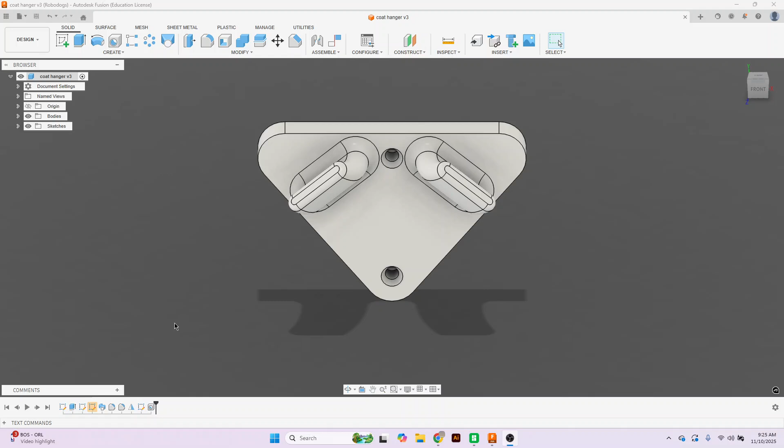All right, for this one, we're going to go ahead and make a coat hanger. You can customize it however you want, but this is how I did mine.

We're going to start by creating a new design, and in this one I believe I did it in inches, so let's do inches. Let me just double check my dimensions real quick. Yeah, we're in inches, we're good.

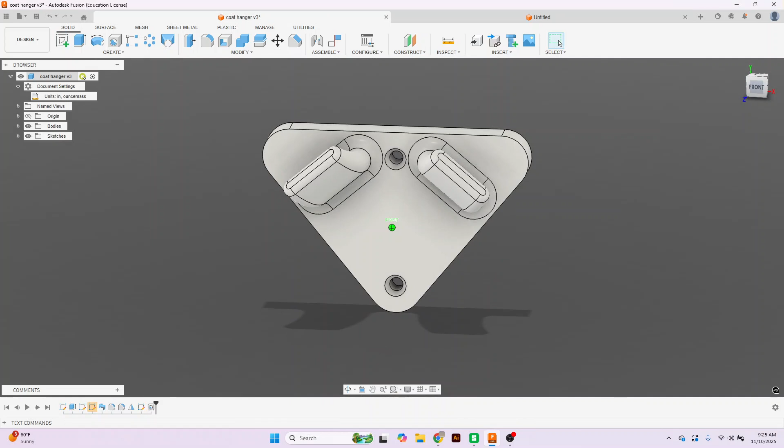Create new sketch. What view am I on? XY. So I'm going to select the XY plane. And I created a triangle.

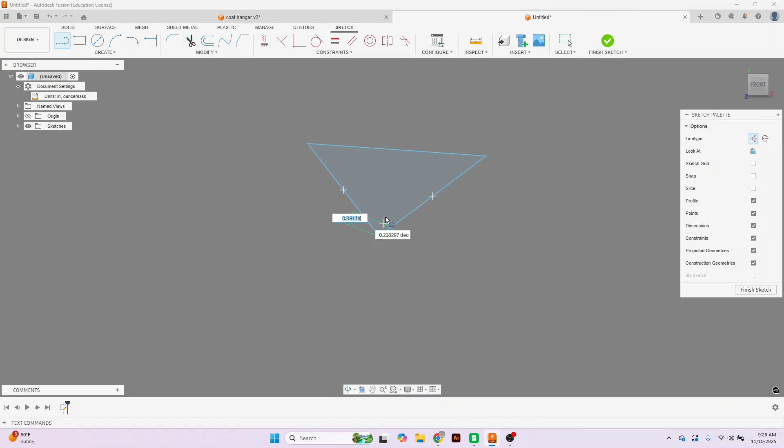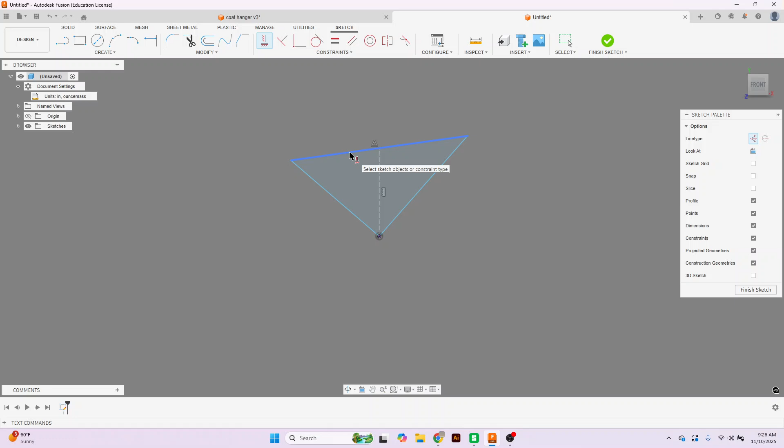You can tell I did put a line in the middle as a vertical line. So I'm going to do a construction line in the middle from here to the midpoint. Notice how when I'm clicking, I have a little triangle - that's the midpoint of that top line. And then when I vertical constrain it, look what's going to happen - it straightens that line out. But I also want this top line to be straight, so I click on that one, and it does a horizontal constraint. So now these two will be equal.

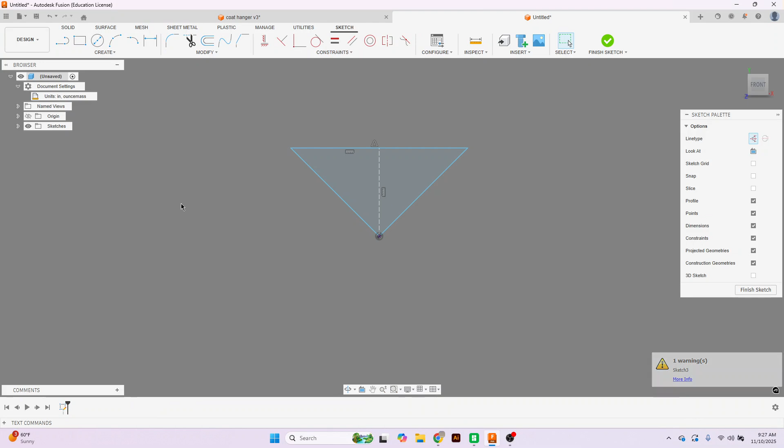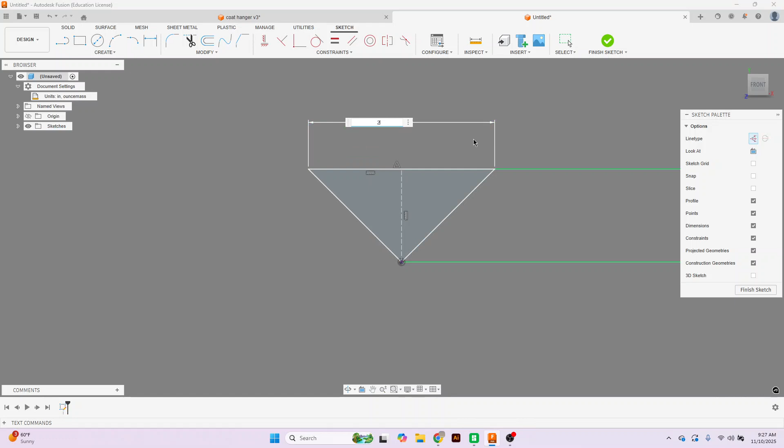I don't have a dimension for this, so let me make it 1.75. Dimension this one 1.75. And the dimension on this one, looks like I did 2 plus 2.5. So this one, this top part is 2.5. We'll adjust it if we need to later.

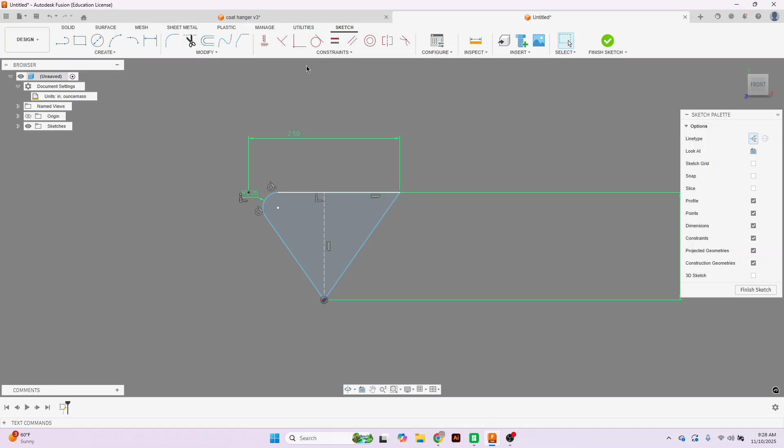Next, I'm going to go ahead and do a fillet command on each of the corners, and this one's going to be 0.25. Got to be careful, I have construction on, let me turn that back off. Fillet. Take the construction off if you have it. 0.25. And then the bottom one. Fillet. 0.25.

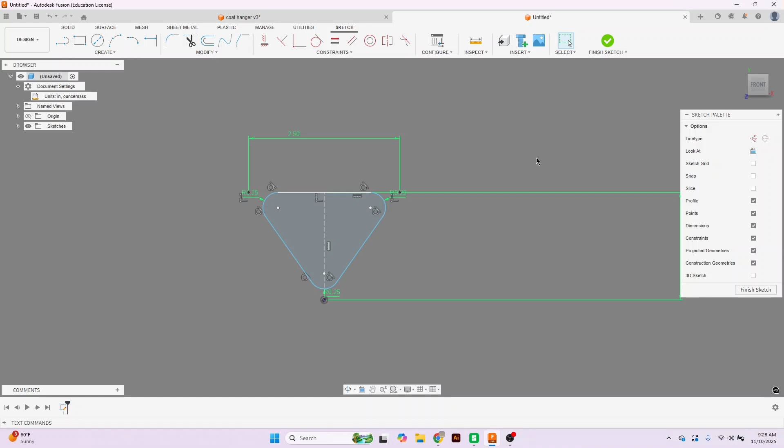These are my final dimensions. Then we're going to keep going. Finish sketch.

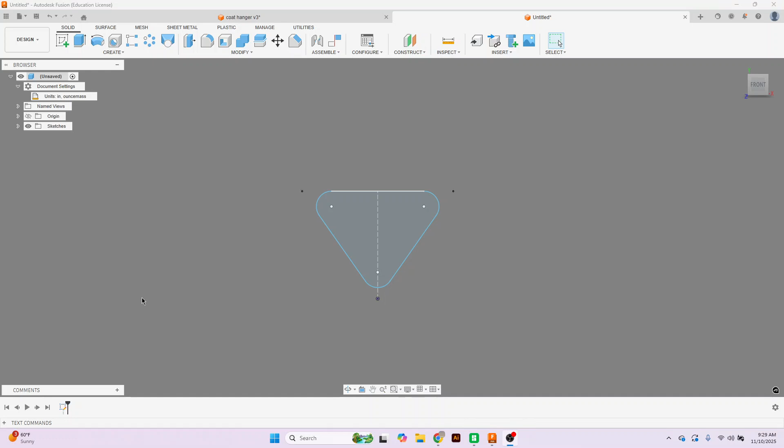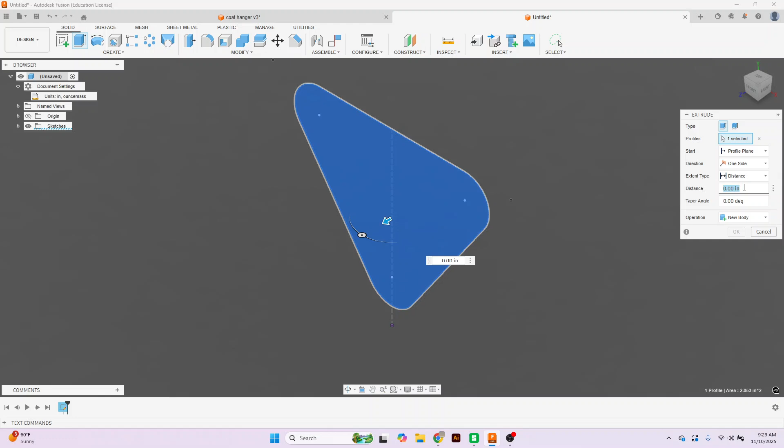All right, so now that we have this, we're going to extrude that. And I believe I extruded it a quarter of an inch. Let me just double check. Yes, a quarter of an inch. So 0.25. There we go. And now I have an extruded, filleted triangle.

The next step is we're going to put our little hooks, and the way I did that is I created a slot command. I created a new sketch. The radius is 0.125 and the length is 0.5. And it looks like this one is parallel with this one, and it's also a perpendicular constraint with this. All right, click on sketch, click on this plane, create, slot.

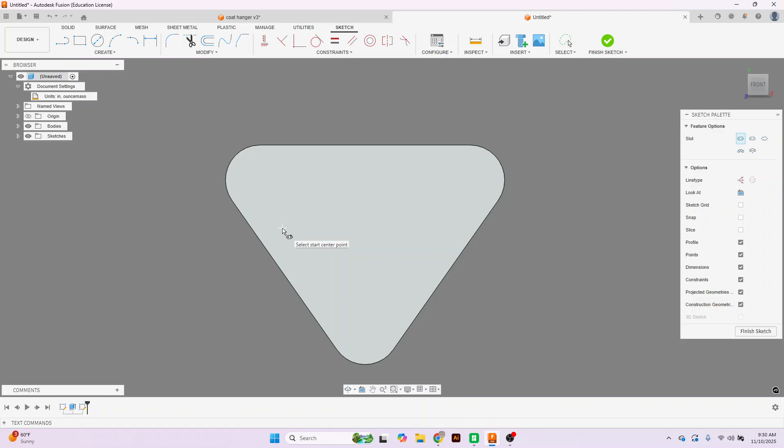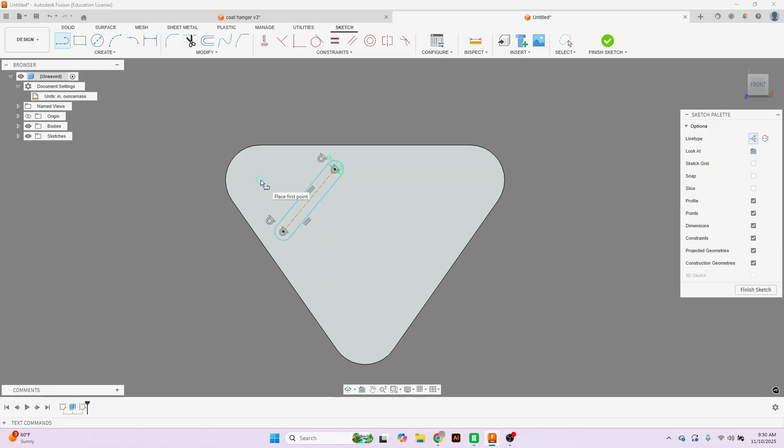And then 0.125. Now I need to have a construction line to mark this. So I'm going to add a line, make sure it's a construction line, and I'm selecting the center of this circle, of this arc here. You can see that it automatically tries to connect to it. And I'm going to connect to the circle on this side, the arc center. I'm going to do the same thing all around.

Then I'm going to do what's called a coincident constraint. Coincident constraint joins the center of this circle with this line, the center of this circle with this line. And then we're going to do a perpendicular constraint with this and this one.

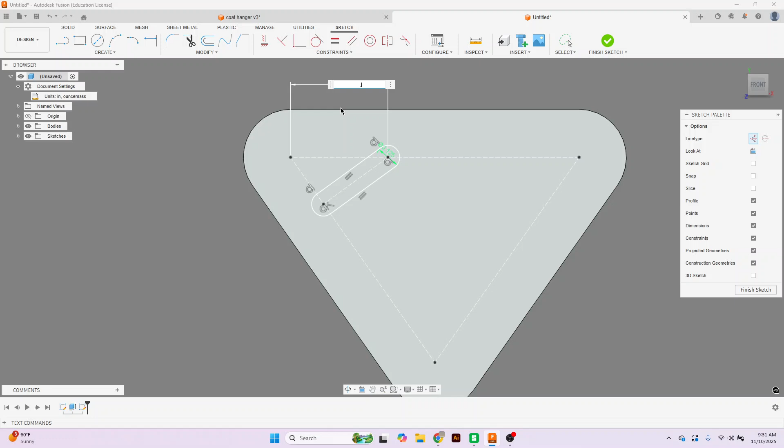Notice how it's kind of angled and stretched out. So I'm going to get out of my command, because you'll notice that it's still in the command. You got to get out of it - right click, click cancel, or hit escape. And I want this to be roughly about right there. There's a couple of different ways to do that. You just dimension this line to this line, put 0.5, and then we're done.

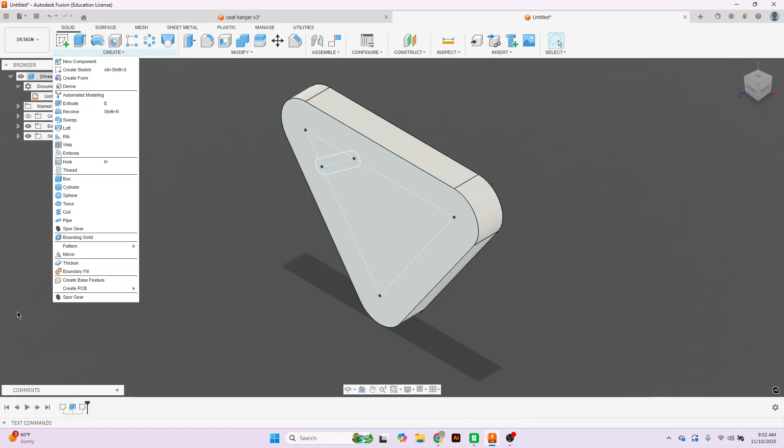You can adjust that however you want. Finish sketch. We're done with that sketch. And this is important because we're going to be doing what's called a sweep command. So we're going to draw where it's going to sweep from, so we're going to take this and we're going to make it go out.

And just to give an example, this is what the sweep command second line is. It's just going to have an arc, and this one I arced it at 1 inch.

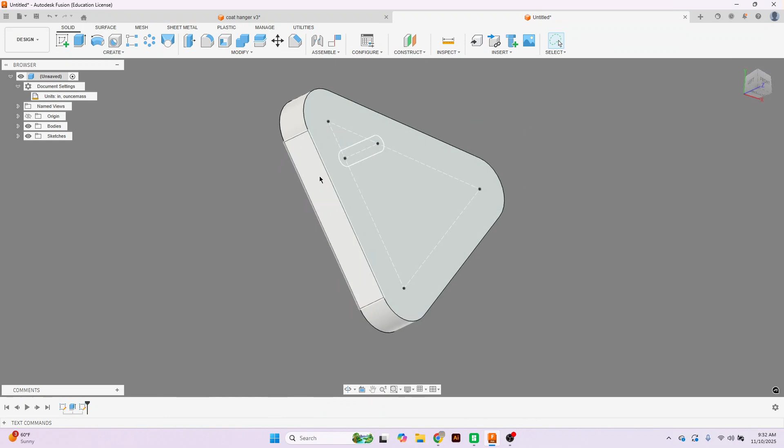So I'm going to draw on this face here. When I create sketch, I'm clicking on this side face right there, and you can see that there's a point right there.

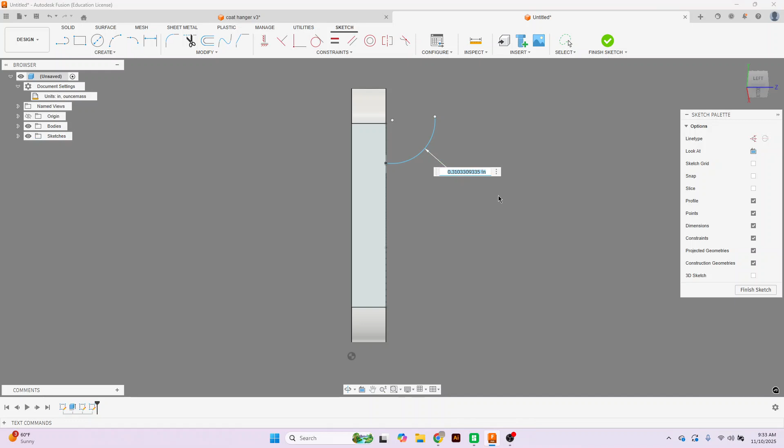That's where I'm going to start my arc. I want this one to be 0.25... it's a 1 inch arc, not 0.25, 1 inch.

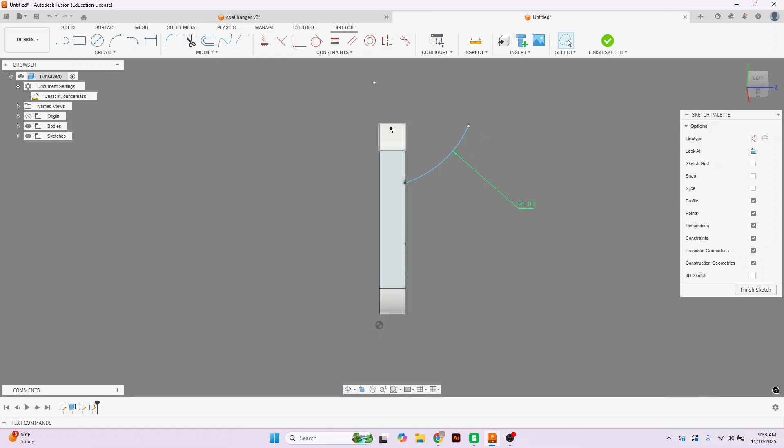I don't want the hook to pass the top part here. You could determine how high you want it. I'm going to try to do a horizontal constraint with this and this. It's not going to work.

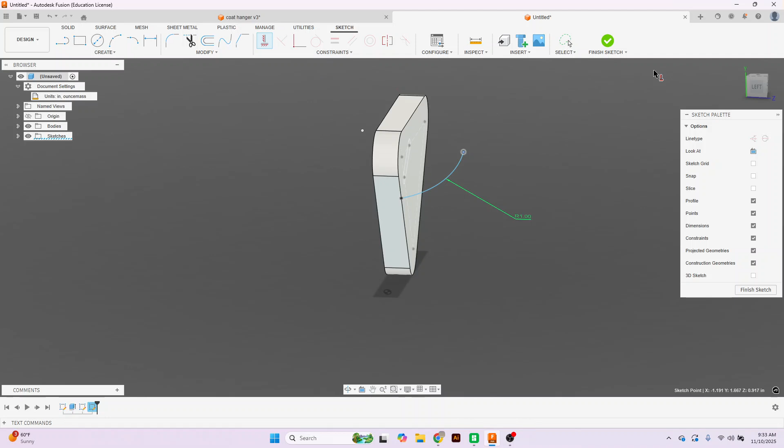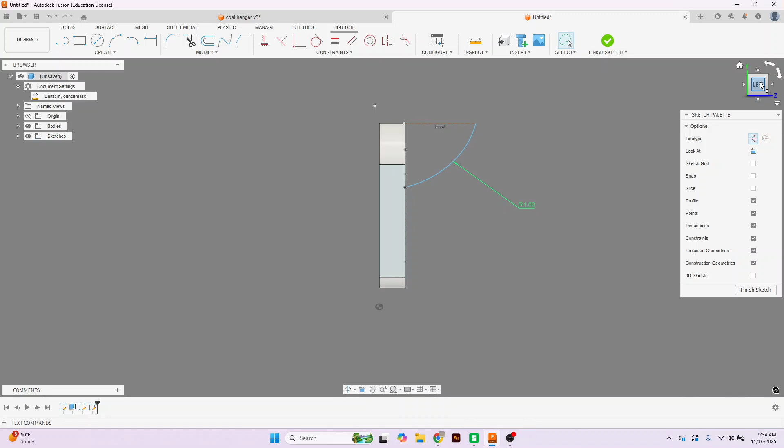So maybe I'm just going to have to draw a line, like a construction line. And then this, I could do a coincident constraint to there. Okay, so now I have my arc and then I have my line.

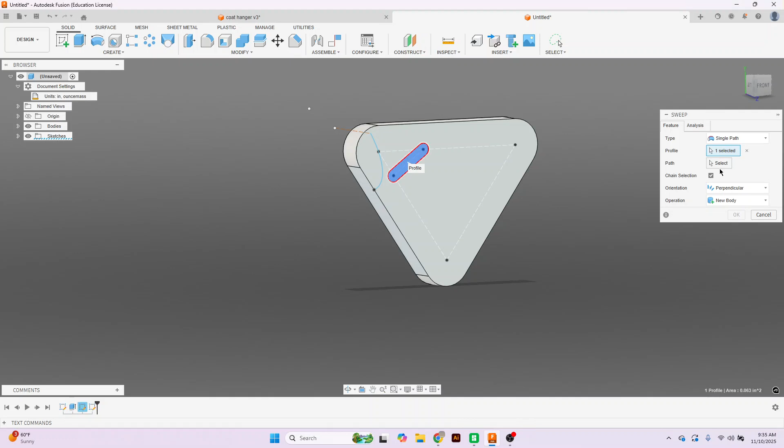Okay, so let's go ahead and click on create, click on sweep. And then our profile is what we want sweeping, so this is the slot command. And the path is this arc.

Now I think it's a little bit too much, but that's okay, I'm still going to click join. Right?

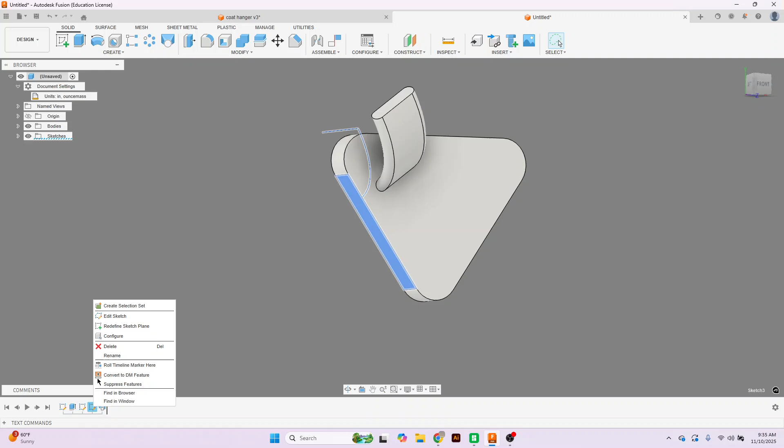And what I could do is I can just go back to the previous sketch, right click, edit sketch, and then I can see how it's a little too high.

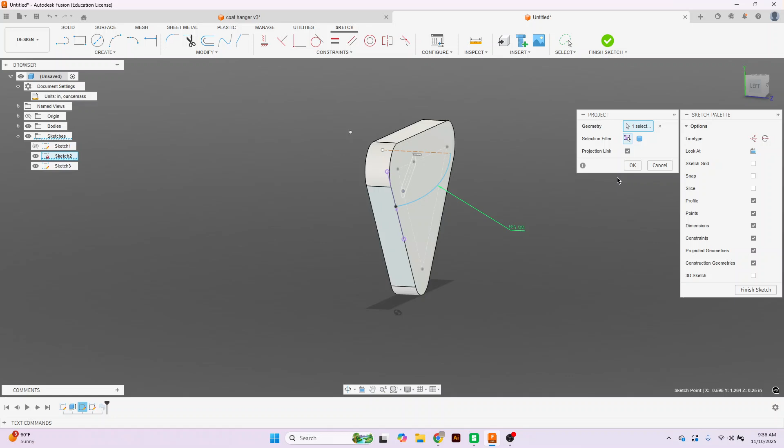I could do a project geometry. And then, you know what, I'm going to also project geometry on this circle. That way I can know where that circle is.

Then I'm going to do a coincident constraint on this and this. And you know what I'm going to do is I'm going to dimension this line and this line to 0.75. And let's see what it looks like.

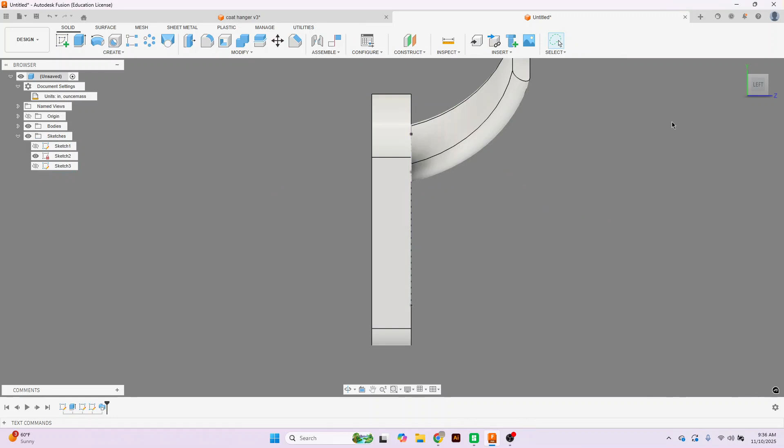I feel like it's a little too high. I'm going to lower it to 0.5. That's better.

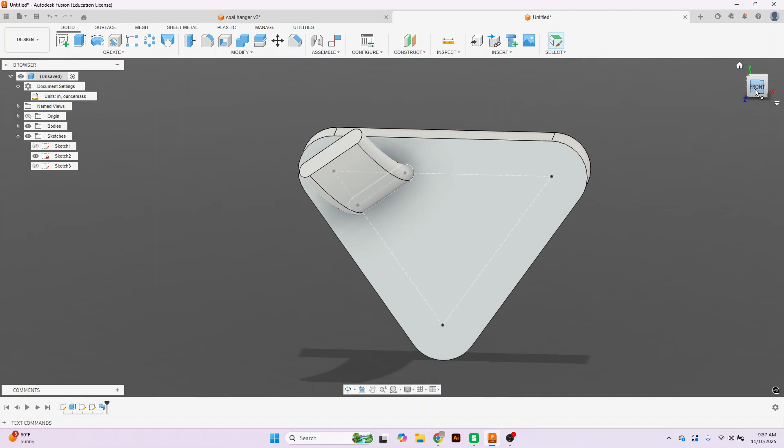Okay, next step, we are going to mirror this command. Notice how we're mirroring an actual part instead of mirroring a sketch, but it's still under create, mirror. And I'm mirroring a feature. There's bodies, faces, features, components.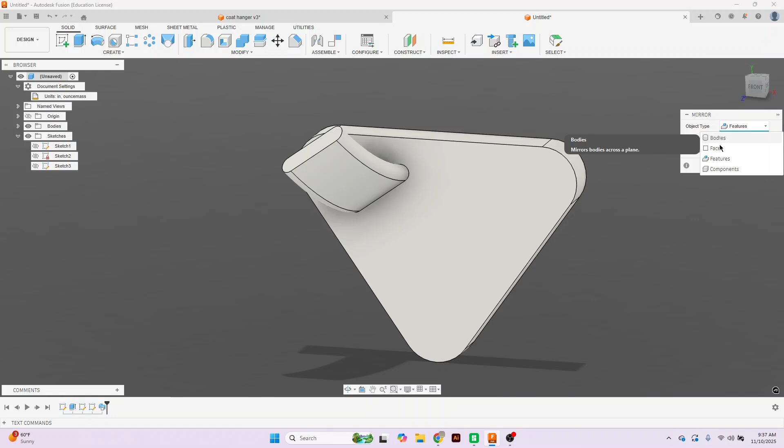Mirror plane, and I'm going to select this line right here. And now I have those two pieces.

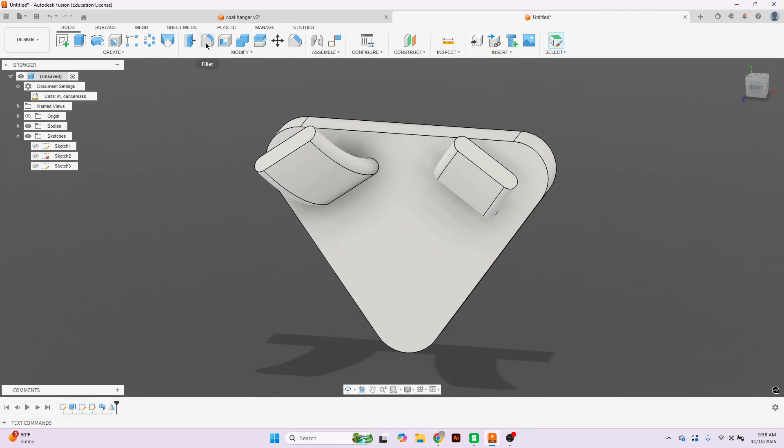All right, next step, do a fillet command. I'm going to fillet this part, I'm going to fillet this part, and I'm going to kind of look to see what looks good. I think 0.1, that looks good.

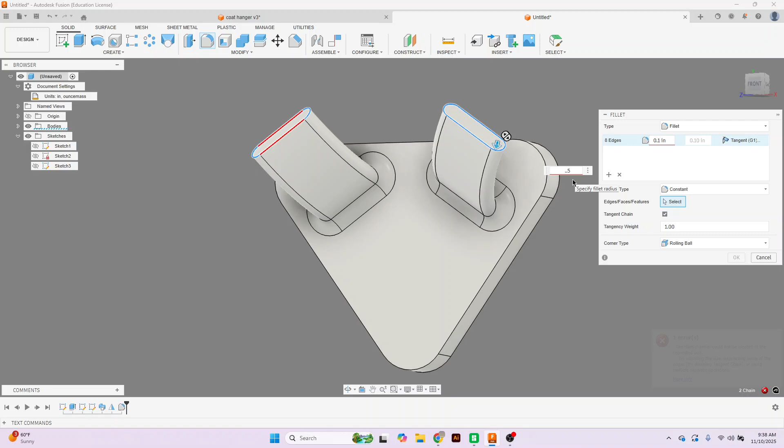Fillet command the top of these two. Let me try 0.1 and see what that looks like. They didn't like that. 0.05... yeah, 0.05 is good.

And then all that's left is the two holes. I'm going to create sketch, and I'm going to select this part. And then I'm going to draw 2 points. We didn't really do points before.

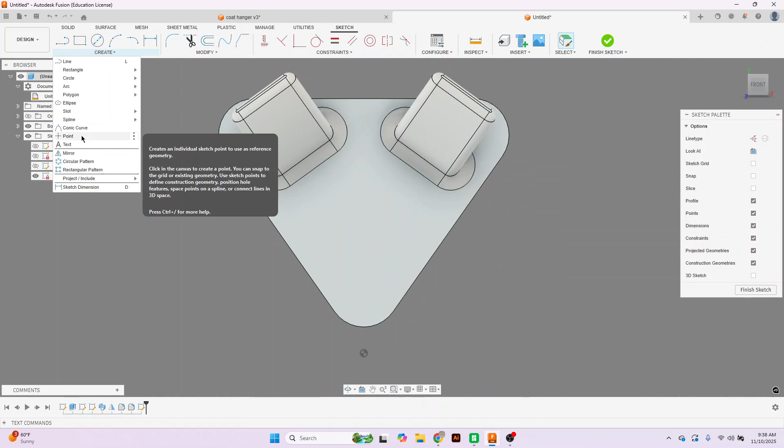When I click on a point, I'm going to have a point there, and a point there. And I'm going to dimension them 1 inch.

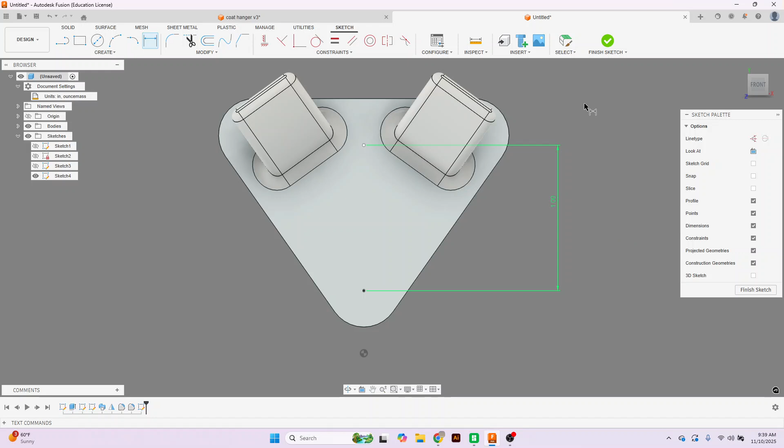And because I have 2 points, what I could do is I can now use the hole command, and I can do both of these holes together. Distance all. I'm going to do a countersink. Simple.

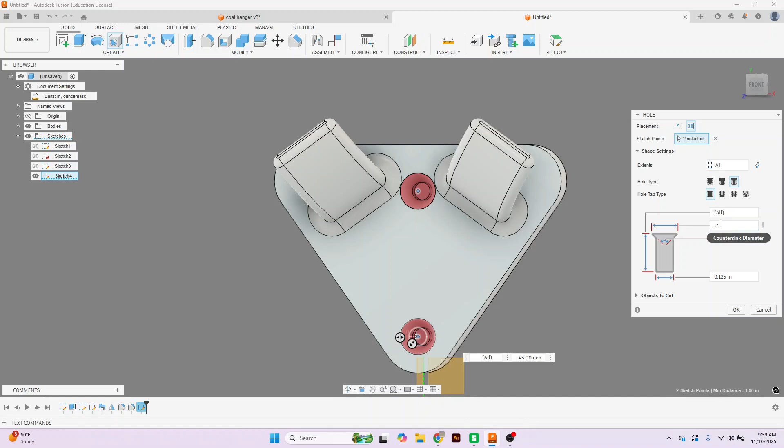Point 2. And then 0.125. And that's it.

Coat hanger, save, and you got yourself a new coat hanger. You can actually go back and adjust the hooks any way you want.

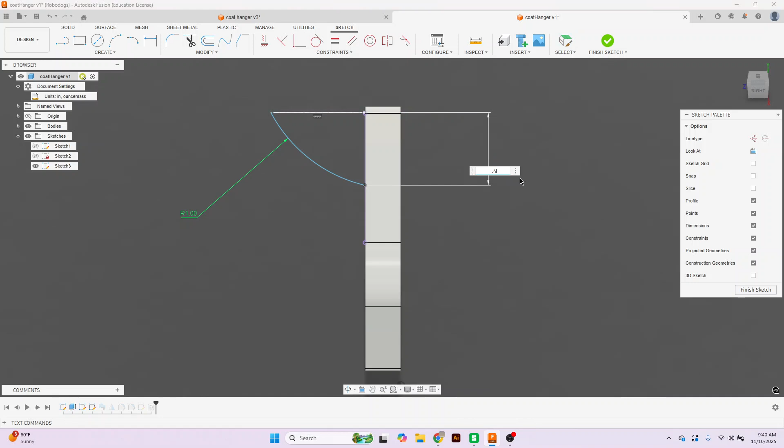Even after you finish CADing, you can come back into your command and adjust your arc. So if you don't want that to be 0.5, you can do 0.4. If you don't want that arc to be 1, you can do 0.9, or even 0.75, and it will adjust automatically down the line. I think this is actually pretty good.